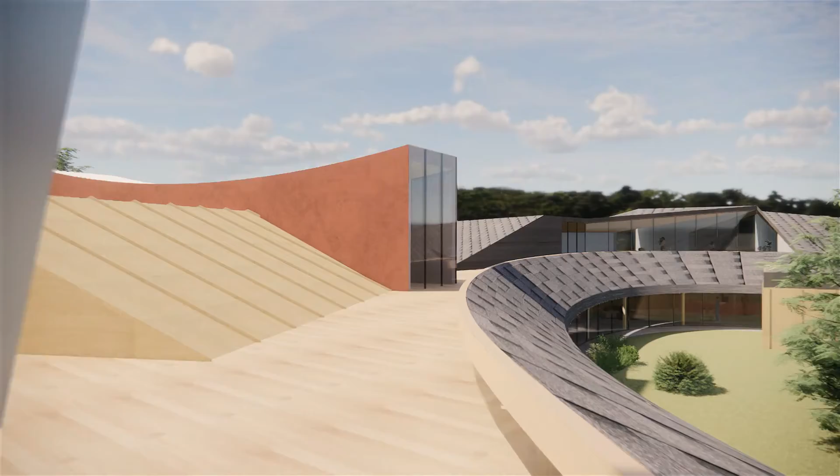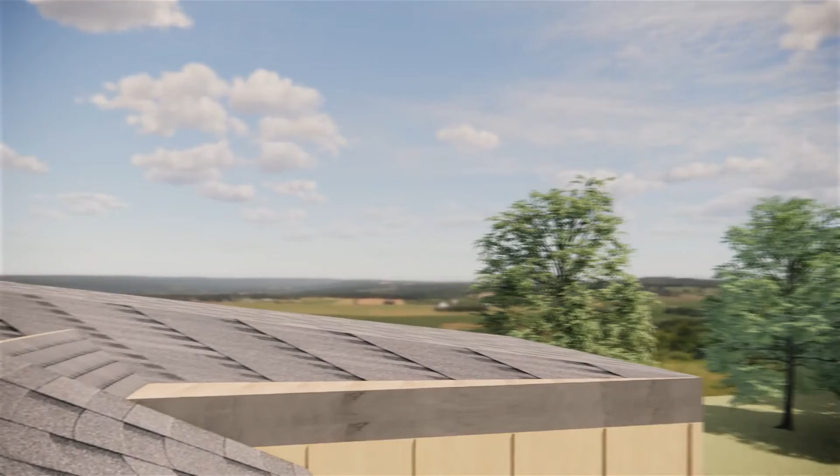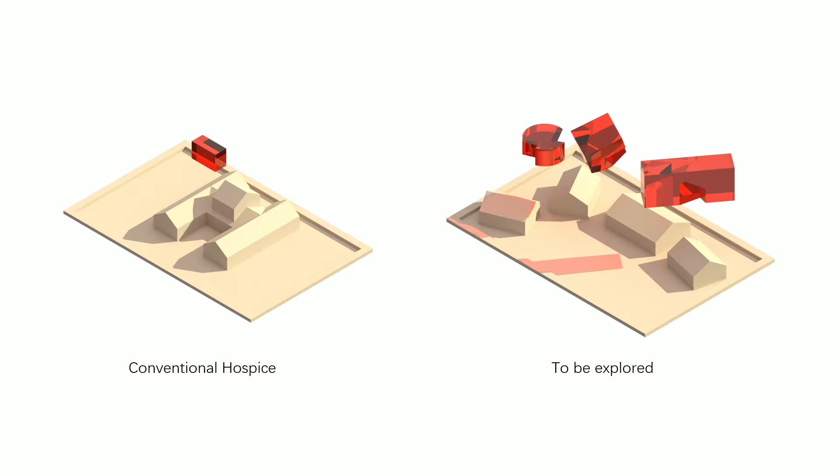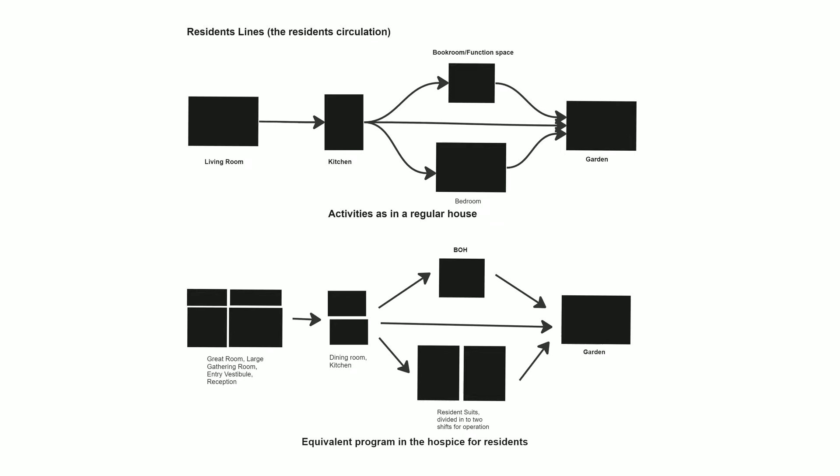In order to do so, I need to transform a conventional hospice into a series of narrative spaces. I started from one of the most important elements of a hospice, which is the home-like feeling. I converted a conventional North American house into a single storyline by deconstructing its programs and finding the equivalent programs of a hospice to match the storyline.

This storyline can be considered as the storyline for residents, since it is purely about the concept of home. However, there are other programs and events that are also relevant, such as those that relate to staff or to family members of the residents.

In this case, there seem to be two different storylines. One is the resident storyline, which can be considered as the past, the memorial world, because we all know the storyline is going to end eventually, and there's barely anything we can do to change the result of that storyline.

The other can be considered as the real world, because the people here are dealing with real world issues, and they are standing on a higher plane, observing the storylines, and can also barely do anything to change the result of the resident storylines.

But there are some moments where these two storylines intersect, and people from the real world can go back and forth between these two storylines. In this case, timeline and storylines are intertwined.

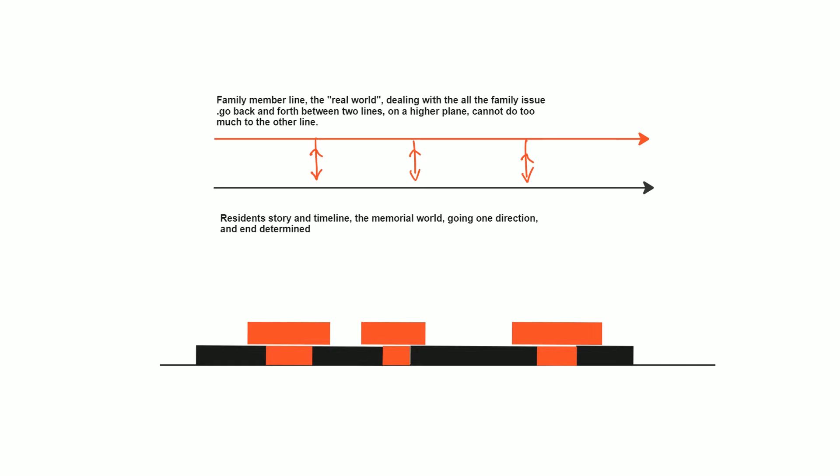To transform this idea into architecture, I first laid out the program from the resident storyline. I chose the typical and conventional form of housing to represent these programs, in order to create an atmosphere of neighborhood to represent the real home for the residents.

These programs are clustered around the natural forest, forming a curve in order to maximize the natural beauty in the reserves, and also to keep maximum distance from the main road and all distractions.

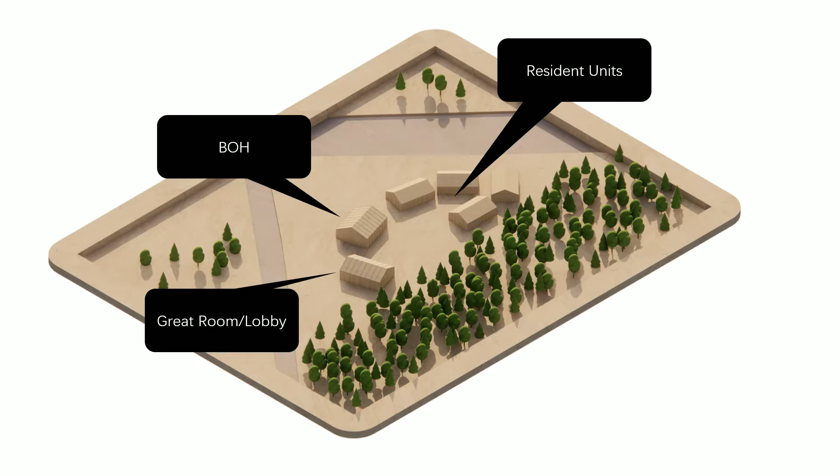These programs are the great room and lobbies, the back of the house, and the clusters of residence units. These programs can find equivalent programs in a conventional house and can be considered as what a resident of a hospice would likely use.

And here are the figure ground drawings representing the location of these programs. Starting from the great room or lobby, this program can be considered as the living room of a home.

In this space, the living room, kitchen, dining, reception, and other spaces are placed together without a barrier in between, in order to maximize the welcoming atmosphere. The huge blue geometry intersecting the space also gives it a relaxing and interesting feeling in terms of spatial quality.

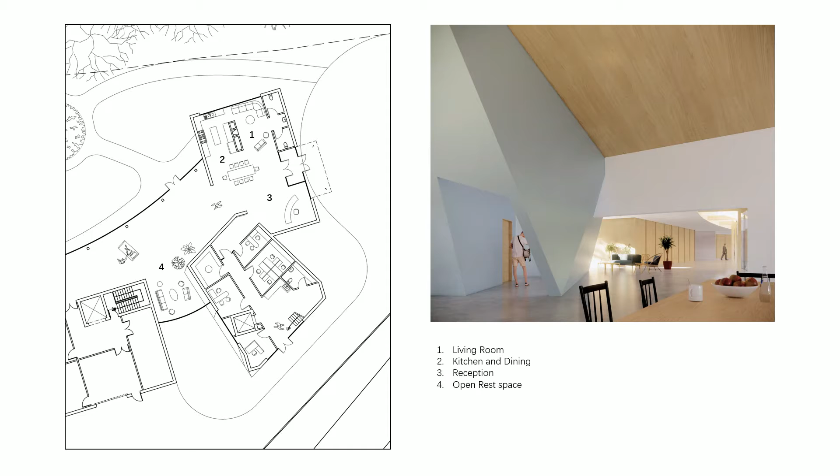Walking into the linear glass hallway, this hallway represents the linear direction of the timeline, or so-called storyline. At the same time...

It is noticeable that the dimension of this hallway is designed to allow residents to stop at any time and anywhere they want to absorb the natural view.

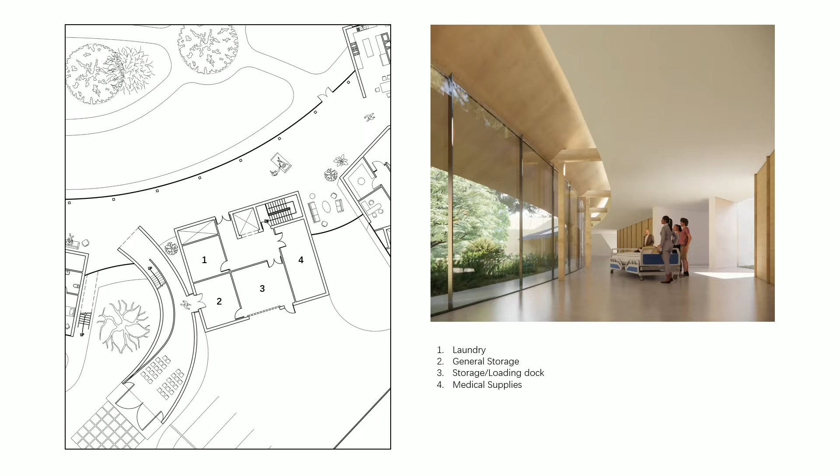Moving forward in the linear hallway, at the end of the hallway is the residential unit clusters. Four different unit buildings are placed in different directions, creating an atmosphere of street or neighborhood, which is actually formed by different buildings instead of a single hospice.

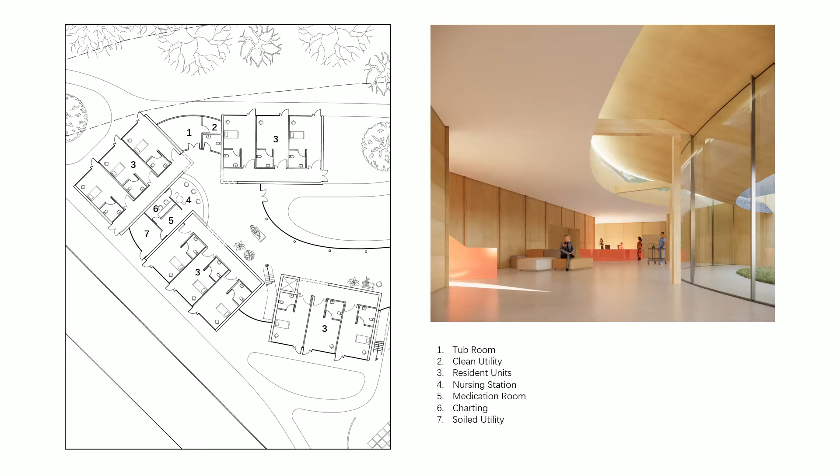The real-world timeline is formed by three different programs. This program looks drastically different from the resident storyline. This helps to extract people from the memory world and bring them back to the real world they belong to.

These forms are also very creative and dynamic, as they represent all the possibilities of the real world compared to the memory or the past.

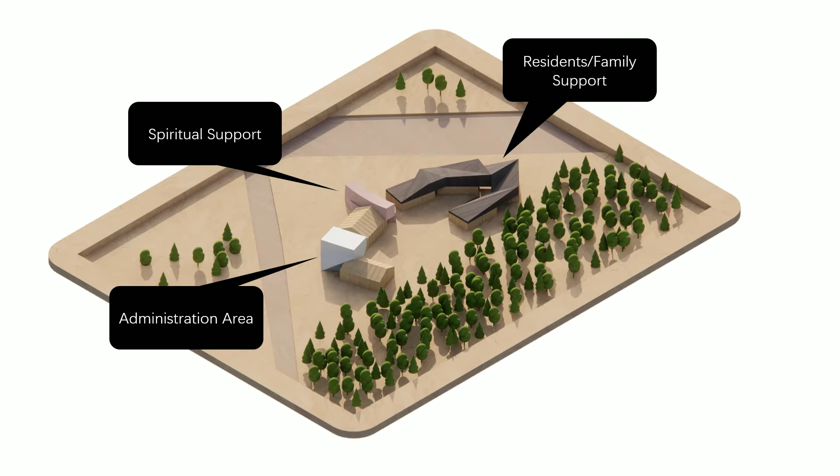These programs are spiritual support, residents/family support, and administration areas, as they need to work as the gateway for people to escape from the sad real memory world and go back to the real world to regulate stimulation.

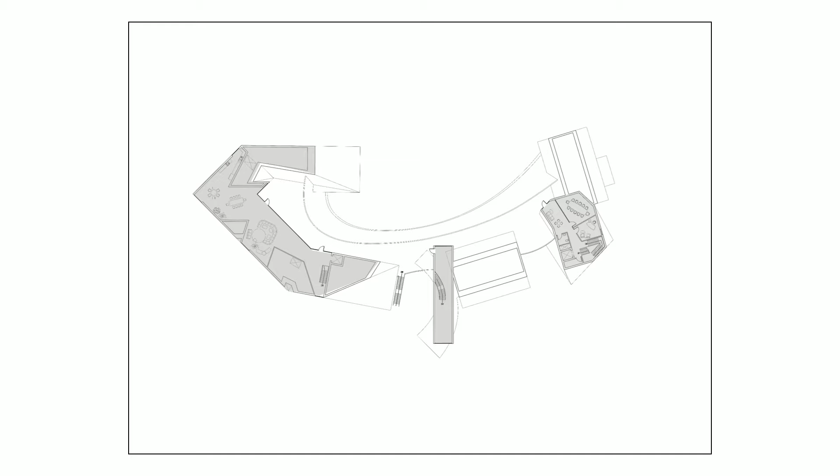Notice that only these programs have access to the 2nd floor or even the 3rd floor, in order to completely separate from the memory world and also to help people rest better.

Each program has its own forming logic to satisfy its own specific needs.

The forming logic behind the administration units is quite straightforward and simple. By elevating the platforms, it is able to absorb the best natural view, and by twisting the platform, it is able to optimize natural sunlight use without overheating.

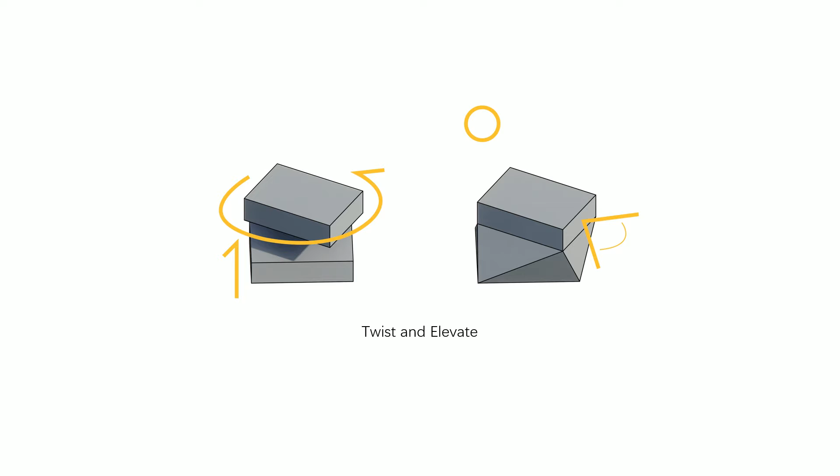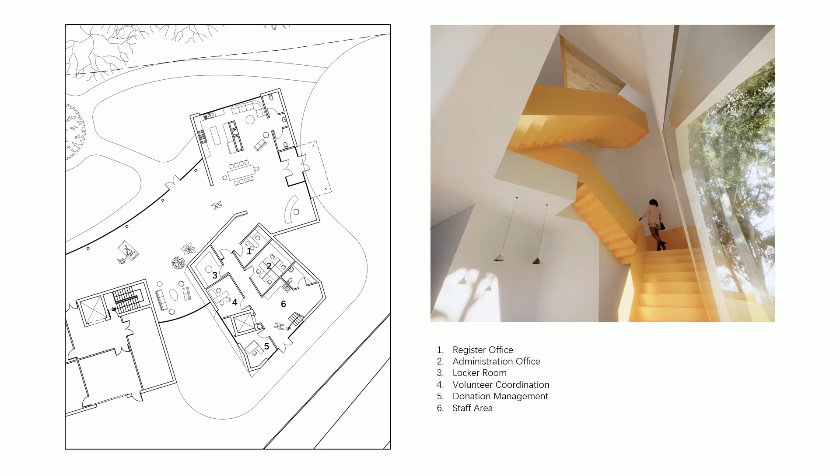The office unit program is connected by a series of staircases. This staircase not only makes the spatial quality more interesting and dynamic, but the bright colors used and the open atrium it creates also help build an energetic and relaxed atmosphere for this unit, which is important for the hospice staff.

The Flexible Education Center is located at the top of the office unit. This makes sure that the study space has the best open natural view and ideal natural light. More importantly, it keeps everything far from the sad memory world, focusing purely on the study.

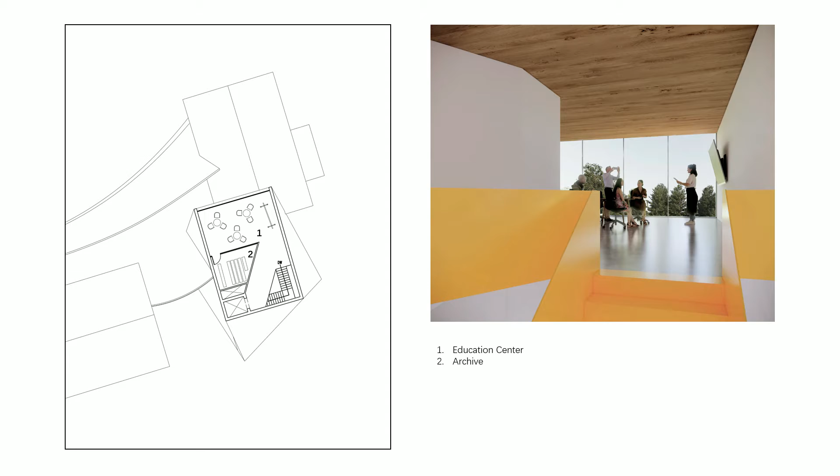The spiritual support space is composed of two oppositely designed spaces. The flexible space at the bottom is designed to maximize privacy and block people's view, while the meditation space at the top maximizes people's view and the sense of openness.

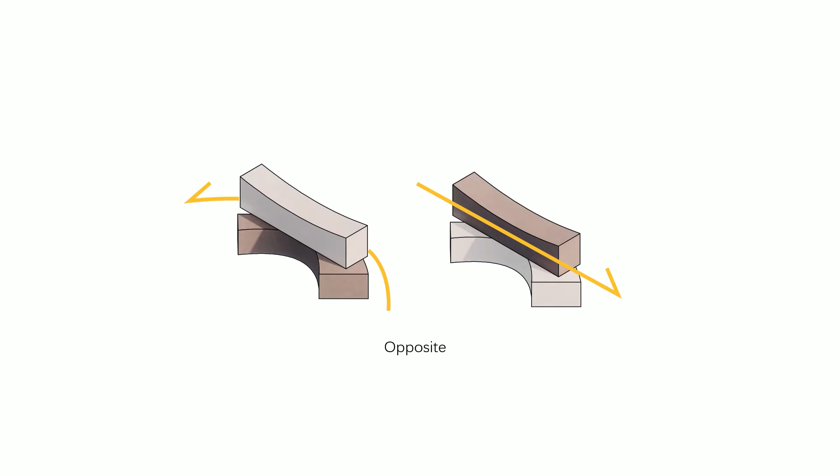The entrance of the spiritual support space is curved to maximize privacy. This curve also creates a tiny pocket park next to it, which provides an interesting and stunning view for the visitor.

The flexible event space is capable of holding a small funeral and other spiritual or religious activities. The space contains both inside and outside parts, since some religious, natural, and cultural activities require outdoor space.

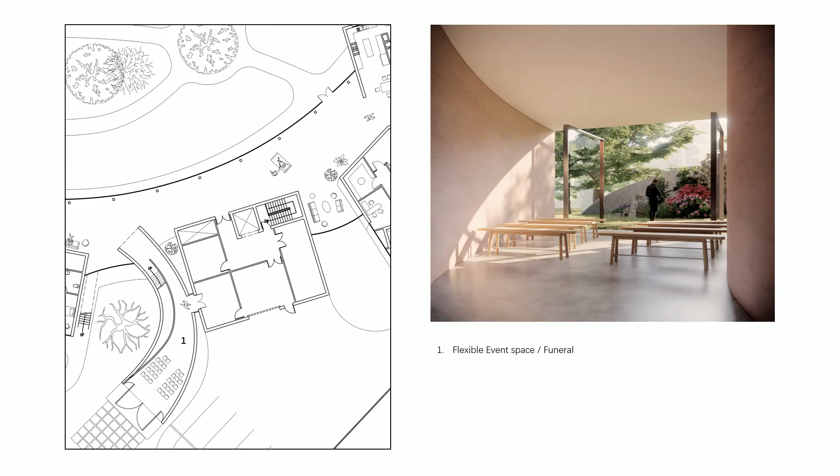The meditation space on the 2nd floor is also designed to be as anonymous as possible in order to avoid conflicts between different religions and cultures. The space is designed to use only natural light and natural views to create a sense of calm for meditation. The triangle on the wall is the section cut between this space and the building adjacent to it, and it represents the connection between the spiritual and the physical world.

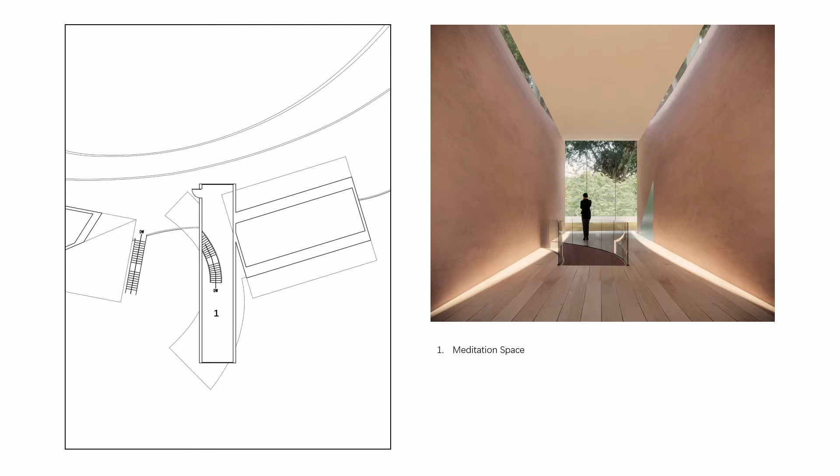The family support space has the most complicated forming logic above all of them, inspired by the logic of origami, which uses a 3-dimensional grid to organically connect different geometry together.

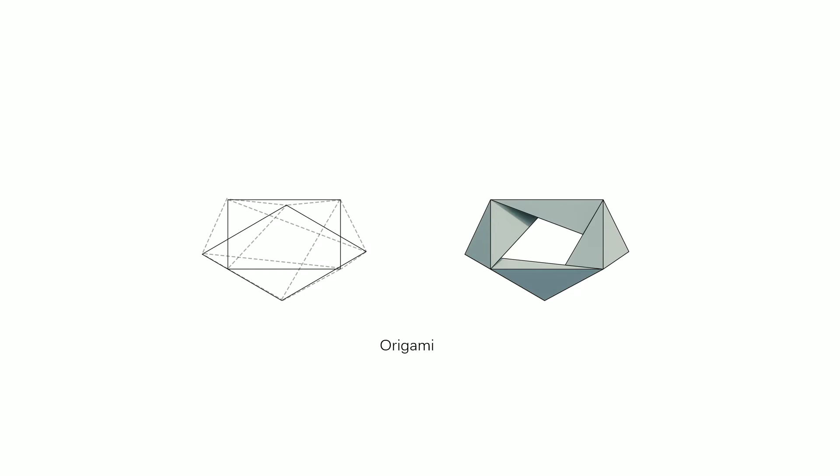I tried to create a series of 3-dimensional grids based on the original roof of residential units. By trying the different possibilities between the nodes of the three-dimensional grids, this roof explores the possibility of a series of roofs, as well as the possibility of what a roof can be.

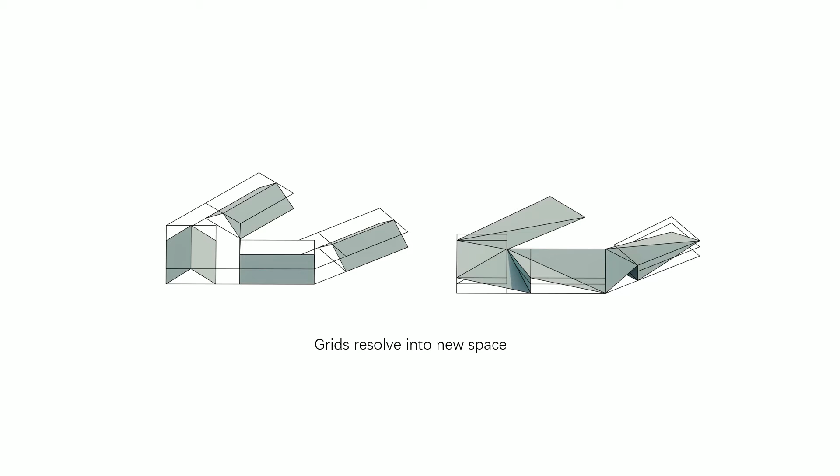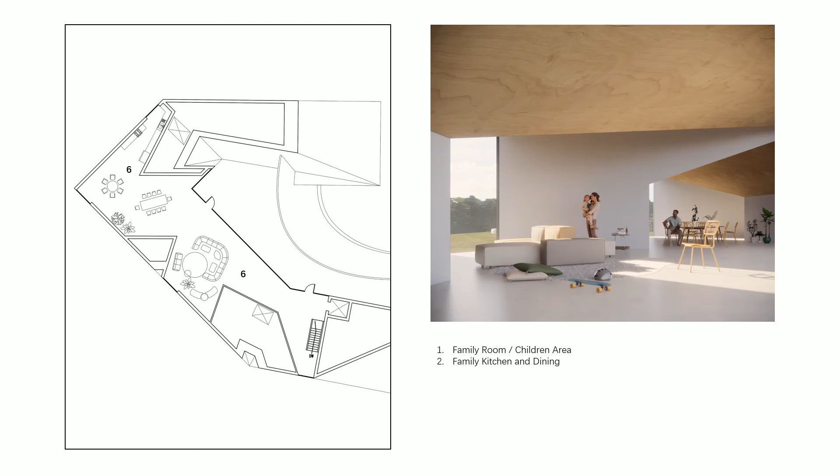The results of this exploration are quite a success. There seems to be a series of different spaces created under one single space. Meanwhile, all of these spaces appear to have both the identity of a conventional building and a roof. People are able to experience multiple spaces at one moment. This explores the possibility of what a roof can be, and more importantly, it recalls the concept of timeline or storyline intertwined.

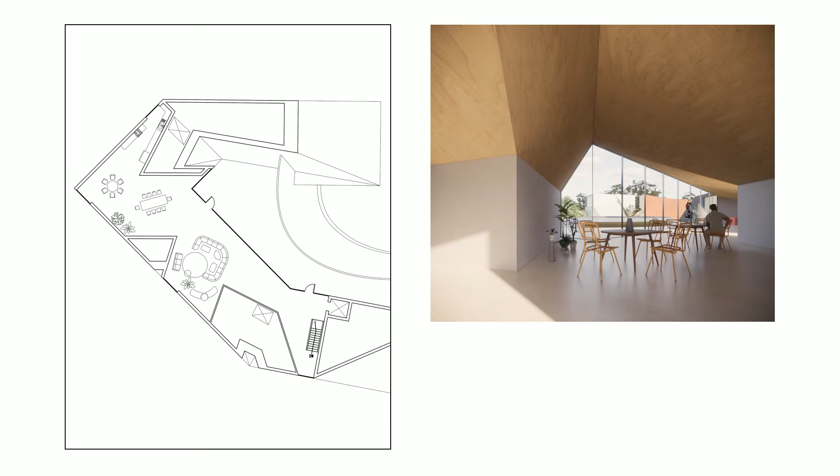The site and building is restricted by a lot of rules, and the design of this building achieves all of these requirements.

The footprint of this building is designed to be within the setback, and the total footprint area of this building is 1,698 square meters, which is under the maximum allowable coverage of the site.

The choice of the main entrance of this building is at the right place as suggested by the building code, and also the turning radius of both the front entrance and the back of house has satisfied the minimum needs of a fire truck and a small van.

Meanwhile, the design of the parking lot and other circulation paths also satisfy the requirements of the green space reservation. On top of that, the design of the building also draws connections from these requirements to have a better response to all of the building code laws.

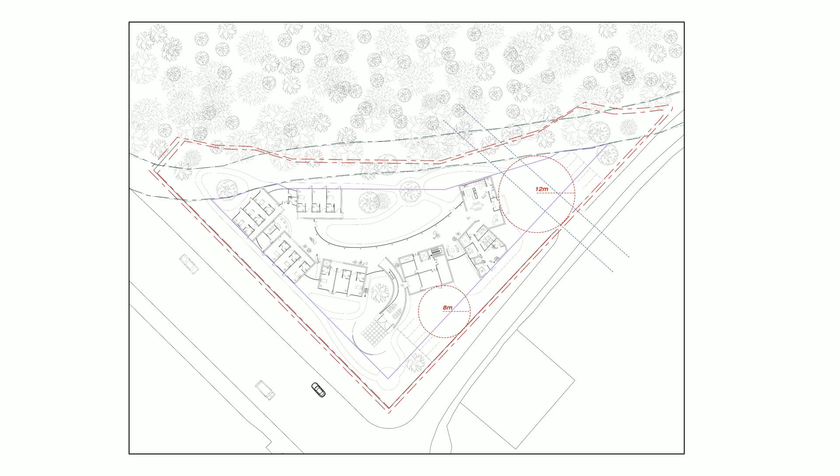The mechanical room of this building is placed at the basement of the back of house. The location of the back of house is chosen to be almost at the middle of this building in order to have an average delivery of energy and HVAC system.

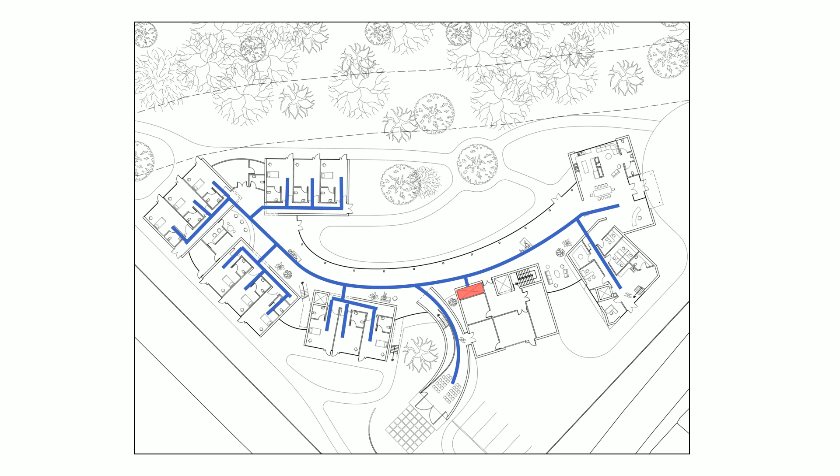Both the family support unit and the spiritual support unit have only 2 floors. Therefore, there's no need to have a different HVAC shaft at the second floor of these two programs. The ventilation can be achieved through the floor or through the wall.

There is a separate HVAC shaft in the office area since there's a 3rd floor. The shaft is placed right next to the elevator core in order to satisfy the needs of the twisting form.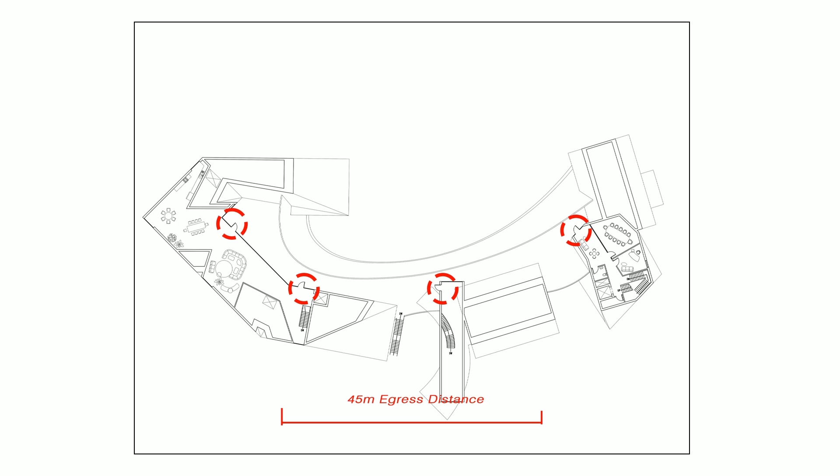There's also a separate egress door for every program on the 2nd floor of these buildings.

The future design of the landscape will mainly focus on the specific selection of vegetation and plants in order to have a better response to the green reservation area.